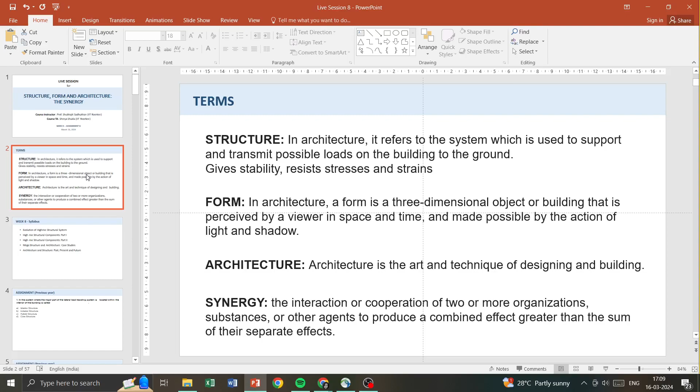What is synergy? Synergy basically means the interaction or cooperation of two or more organizations, substances, or agents to produce a combined effect which is greater than the sum of their separate effects. This means that if we added the effects of three entities separately, when we talk about synergy, the amalgamation or interaction of more than two agents together, the output is bigger than the combined sum of their separate effects. So synergy is not just summation of effects, but bigger than that, because the output is the amalgamation of all the entities, which makes it more complex and with a bigger effect.

The syllabus for the last week, week 8, had 5 lectures. The first covered evolution of high-rise structural systems - what high-rises were in the past and what it means now, from the first skyscraper building in Chicago, the subsequent increase in high-rise buildings, skyscrapers, and terminologies. Then there were 2 parts on structural components, where different kinds of structural components applicable in high-rise structures were discussed in great length. The 4th lecture was about mega structures and architecture case studies, where the most famous case studies of mega structures were discussed, like the Burj Khalifa and others.

The last lecture of the entire course was about the architecture and structure of the past, present and future, where a brief journey through past structures, what is happening contemporarily, and what would be the future was discussed. The future was not talked about just in terms of technology, but also in terms of sustainability, because people are becoming more sensitive and understanding of the environment currently.

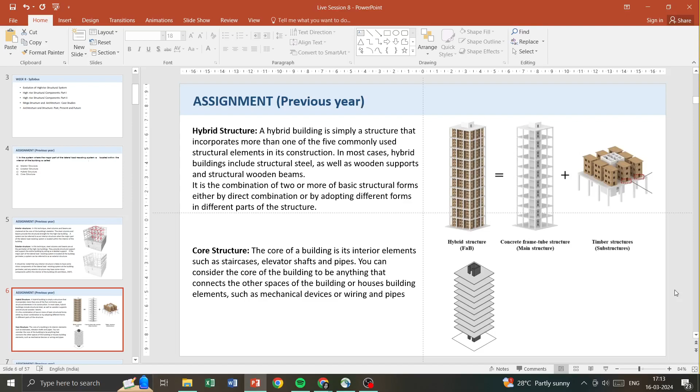What is a hybrid structure? A hybrid building is simply a structure that incorporates more than one of the five commonly used structural elements in its construction. In most cases, hybrid buildings include structural steel as well as wooden supports and structural wooden beams, etc. What are core structures? The core of a building is its interior elements such as staircases, elevator shafts and pipes. You can consider the core of the building to be anything that connects the other spaces of the building, or houses building elements such as mechanical devices, wiring and pipes.

So our answer is interior structure. In the system where the major part of the lateral load resisting system is located within the interior of the building, it is called an interior structure.

Question number 2: Match the following buildings and their locations. Three buildings have been given and three locations have been given, and you have to match these buildings with their locations. The buildings are Seagram Building, International Commerce Center, and Kingdom Tower, and the locations are Hong Kong, USA and Saudi Arabia.

First we'll talk about Seagram Building. Seagram Building is a skyscraper - I have added the image and the plan of the building. It is located in New York City, USA, designed by Ludwig Mies van der Rohe with minor assistance from Philip Johnson, Ely Jacques Kahn and Robert Allan Jacobs. The tower is 157 meters tall with 38 stories. It is an international style building with a public plaza, initially serving as headquarters of the Seagram Company, a Canadian distiller. It was completed in 1958, and the building typology is office, with architectural style being international style.

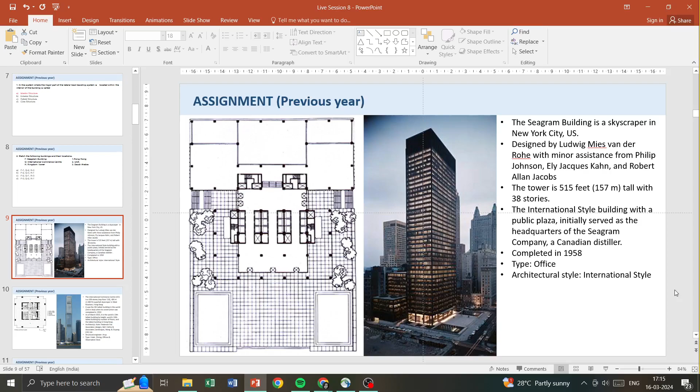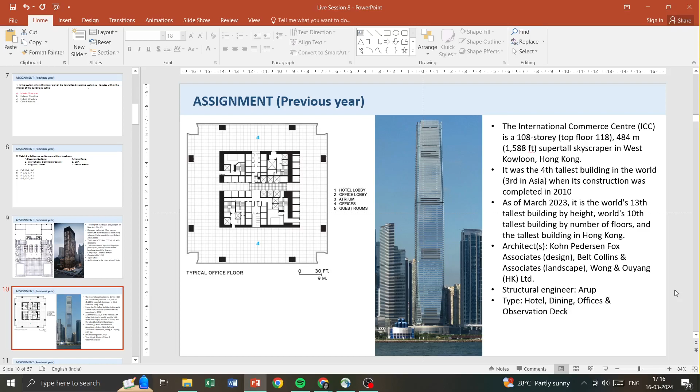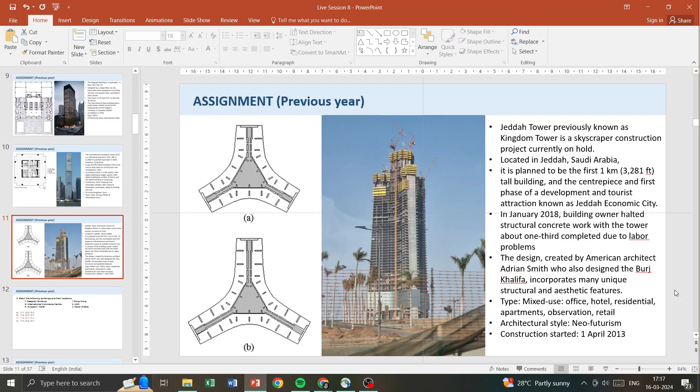Then the third building, Jeddah Tower, previously known as Kingdom Tower. It is a skyscraper construction project currently on hold, located in Jeddah, Saudi Arabia. It is planned to be the first 1 kilometer tall building, the centerpiece and first phase of development of a tourist attraction known as Jeddah Economic City. In January 2018, the building owner halted structural concrete work with the tower about 1/3 completed due to labor problems. The design, created by American architect Adrian Smith, who also designed the Burj Khalifa, incorporates many unique structural and aesthetic features. The type is mixed use - office, hotel, residential apartments, observation and retail. The architectural style is neo-futurism, construction started in 2013 and is currently on hold.

So our answer is that Seagram is located in USA, P2. International Commerce Center is located in Hong Kong, Q1, and Kingdom Tower is located in Saudi Arabia, R3. So the correct answer is C: P2, Q1, R3.

Question number 3: Taipei 101 is an appropriate example of - diagrid structure, tube and tube structure, outrigger structure, or super frame structure?

Taipei 101 is located in Xinyi, Taipei, Taiwan. The total height is 508 meters with 101 floors. The area of the plan is 50 meters by 50 meters. Cost of construction was 700 million. Architects were C.Y. Lee and partners, and the structural engineer was Shaw Shie. It was started in 1998, and the building is an office complex plus mall. The structural system of the building includes outrigger trusses, moment frames, and belt trusses.

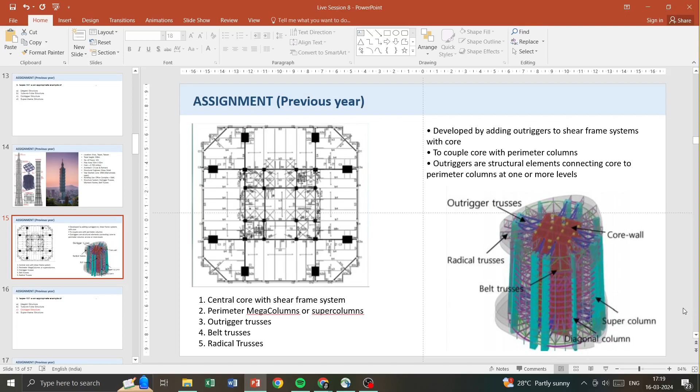Outrigger trusses are added at different floors or levels in which the core is connected to the outer columns. So we have mega columns in Taipei 101 on the surrounding, and a central shear frame system, with outrigger trusses on different floors which connect the core to the mega columns. So the answer is outrigger structure, because outrigger trusses are used in this structure. The correct answer is C, outrigger structure.

Question number 4. Which of the following high-rise structural systems has the highest structural efficiency to build tall structures? Concrete framed tube, steel diagrid, tube and tube, steel framed tube.

Framed tube system is one of the most widely used tube systems. Compared to tube and tube system, it features a much stiffer exterior tube. The stiff tube is achieved through closely spaced columns connected by deep spandrel beams, which are firmly joined together to make the stiff exterior shell.

So what happens in framed tube is that it has a really tough exterior tube. It's a tube type of structure, but the exterior is really stiff, and that stiffness is achieved by closely spaced columns connected by deep spandrel beams which are joined together to make the stiff exterior shell.

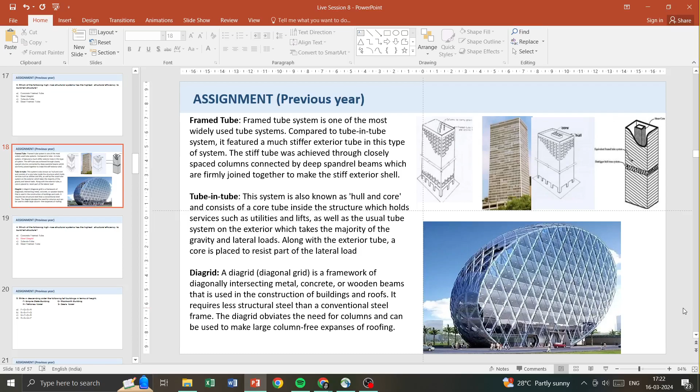Then diagrid. A diagrid, or diagonal grid, is a framework of diagonally intersecting metal, concrete or wooden beams that is usually used in the construction of buildings and roofs. It requires less structural steel than a conventional steel frame. The diagrid obviates the need for columns and can be used to make large column-free expanses of roofing.

So the options were concrete framed tube, steel framed tube, steel diagrid, and tube and tube. The answer with the highest structural efficiency is steel diagrid.

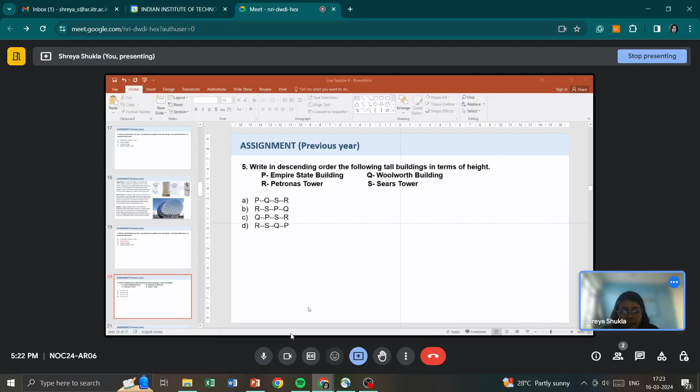Question number 5. Write in descending order the following tall buildings in terms of height: Empire State Building, Woolworth Building, Petronas Tower, Sears Tower.

So this is how the four buildings mentioned in the question look like: Empire State Building, Woolworth Building, Petronas Tower and the Sears Tower.

We have been asked what is the descending order of the following tall buildings in terms of height. Descending order as in from tallest to shortest.

Empire State Building is a 102-story Art Deco style skyscraper in Manhattan, New York. It was designed by Shreve, Lamb and Harmon and built from 1930 to 1931. Its name is derived from Empire State, the nickname of the state of New York. The building has a roof height of 380 meters and stands a total of 443 meters tall, including its antenna.

The Woolworth Building is an early American skyscraper designed by architect Cass Gilbert, located at 233 Broadway in the Tribeca neighborhood of Manhattan, New York City. It was the tallest building in the world from 1913 to 1930, with a height of 241 meters. More than a century after its construction, it remains one of the 100 tallest buildings in the US. The architectural style is neo-Gothic.

The Petronas Towers, also known as KLCC Twin Towers, are a pair of 88-story supertall skyscrapers in Kuala Lumpur, Malaysia, standing at 451.9 meters. They were the tallest buildings in the world from 1998 to 2003, until surpassed by the 2004 completion of Taipei 101. The Petronas Towers are the world's tallest twin skyscrapers and remained the tallest buildings in Malaysia until 2019, when surpassed by the Exchange 106. Their architectural style is postmodern Islamic architecture.

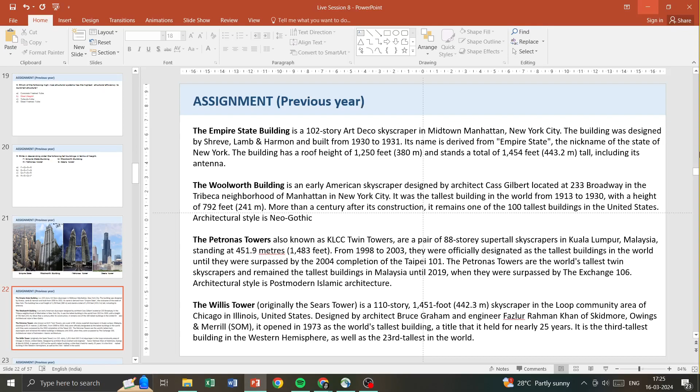The Willis Tower, originally known as Sears Tower, is a 110-story, 442-meter skyscraper in the Loop community area of Chicago, Illinois, United States. It was designed by architect Bruce Graham and engineer Fazlur Rahman Khan of Skidmore, Owings and Merrill (SOM). It opened in 1973 as the world's tallest building, a title it held for nearly 25 years. It is the third tallest building in the Western Hemisphere and the 22nd or 23rd tallest in the world.

This is an image showing different skyscrapers along with their height. The tallest structure right now is Burj Khalifa at 828 meters, Taipei 101 at 508, Petronas Towers at 452, Sears Tower at 442, Empire State at 381, and Woolworth Building at 241. So our answer in order would be Petronas Tower, Sears Tower, Empire State, then Woolworth. Petronas Tower is R, Sears Tower is S, Empire State is P, and Woolworth Building is Q. So the answer is B: R, S, P, Q.

Question number 6: Which of the following is an example of a diagrid exterior structure? Aon Centre, USA; Carnegie Hall Tower, USA; Burj Al Arab, Dubai; O14 Building, Dubai.

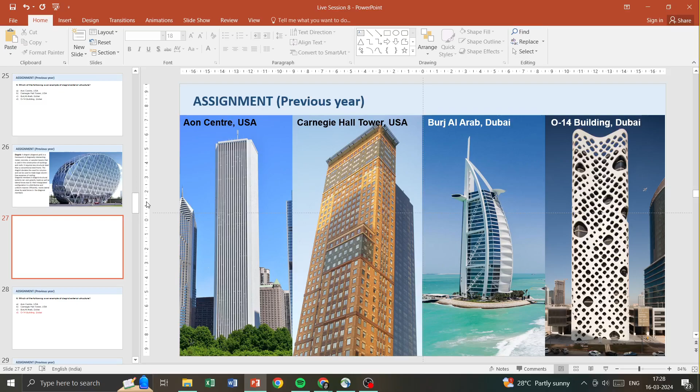The buildings mentioned in the question are Aon Centre, USA; Carnegie Hall Tower, USA; Burj Al Arab, Dubai; and O14 Building, Dubai. Burj Al Arab, Dubai, uses an exterior frame structure with a braced frame structure, as is evident from images, which might or might not be given in your questions—so you'll have to remember what kind of buildings look like what. The O14 Building, Dubai, actually has a diagrid structure; it's visible how there is a diagonal grid going on in the building. So the answer is O14 Building, Dubai.

Question number 7: A dash consists of horizontal girder and vertical column members rigidly connected together in a planar grid form. Options: coffer slab, moment resisting frame, filler slab, outrigger frame.

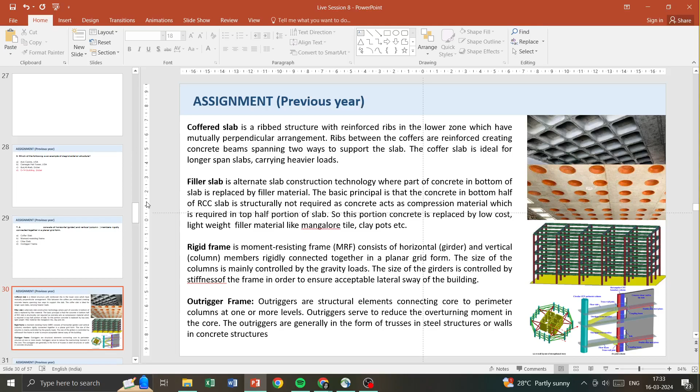Outriggers serve to reduce the overturning moment in the core, and the outriggers are generally in the form of trusses in steel structures or walls in concrete structures.

So our answer is moment resisting frame. A moment resisting frame consists of horizontal girder and vertical column members, which are rigidly connected together in a planar grid form.

It was opened in 1976. The architect was Edward D. Dart. There are 104 stores in this building, and there are 74 floors. The total retail floor area is 70,400 square meters. It is named after the nearby Chicago Water Tower, and it is owned by affiliates of Brookfield Property Partners.

So what are the different types of tube and tube systems? All four structural systems mentioned in the question are different types of tube systems. I'll quickly explain what these are.

Tube in tube system: a tube in tube structural system is a form created by an inner core within an outer frame tube, where a portion of the lateral load is resisted by the core. The combined action of the core and the framed tube aids in resisting gravity and lateral loads. Core and outer tube are connected by the floor diaphragm, which transfers the lateral loads to both systems.

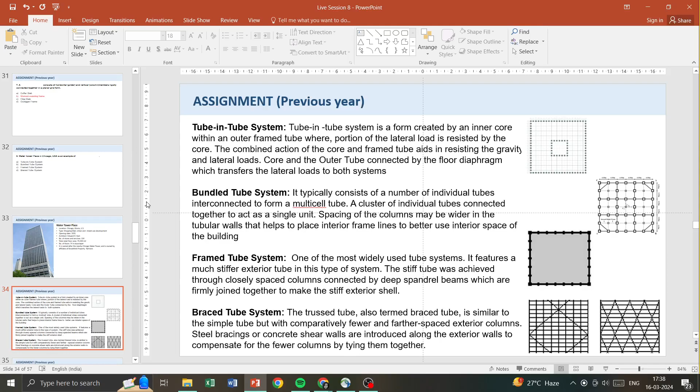So what happens in braced tube system is that it's a simple tube system in plan, with fewer and farther spaced exterior columns. But on the exterior there are steel bracings connecting the different ends of the system together to compensate for the fewer columns. So in plan there are fewer columns, but the structural efficiency is supported by the provision of bracing in the outer shell. So these are the four types of tube systems, and this is what Water Tower Place looks like and is.

Now looking at the plans and sections or elevations of the different tube systems. In framed tube, you see the columns are very closely spaced because there is no internal core. In trussed tube, the columns are sparsely spaced, but there is a brace or truss outside the structure to support it structurally.

In bundle tube, different tubes or different squares or cuboids of columns are built in together. Then framed tube-in-tube, when the outer is a framed tube, columns are placed very close to each other, and there is one internal tube, meaning the internal core is also taking load.

Then trussed tube-in-tube, in which the columns in the exterior are at some spacing, but they are structurally supported by braces, and in the interior there is also a core which takes the load. The core also takes the load structurally.

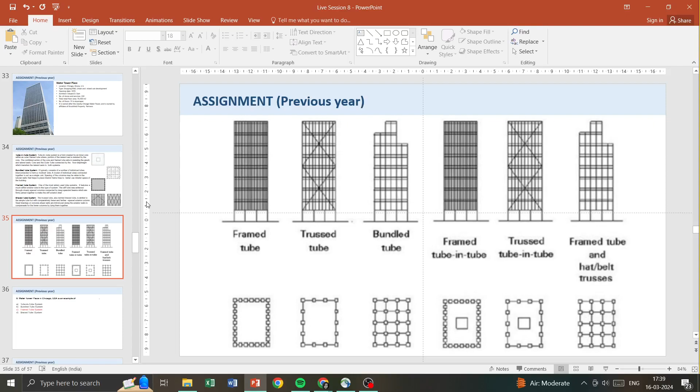Then framed tube and belt trusses, so it's a bundled tube kind of structure with different belt trusses in it. So our answer is framed tube system.

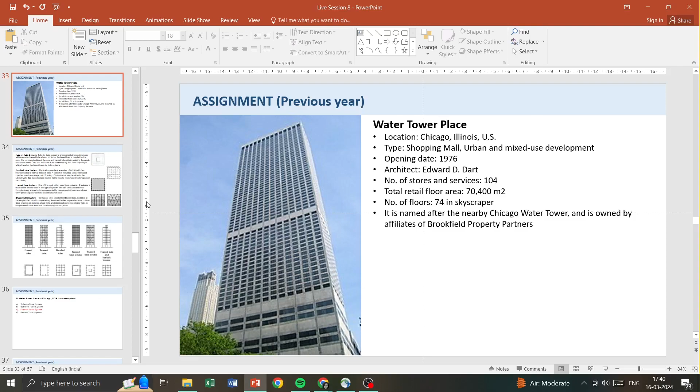The Water Tower Place Chicago is an example of framed tube system because it has spandrel beams at different levels, stiffening it up, and the structure has columns outside the perimeter. So the answer is framed tube system.

Question number 9. Which of the following building structures is an example of bundled tube system? Sears Tower USA, John Hancock Center USA, Seagram Building USA, Shanghai Tower China. So which of these is an example of bundled tube system?

So this is how the buildings look like. This is Sears Tower in US, then John Hancock Center, Seagram Building, and Shanghai Tower. Now I have added sections and plans of these buildings here.

So Sears Tower, on different floors you can see it's a bundled tube structure. In the initial floors it has a grid of 3 by 3, 9 bundles. On the above floors, the bundles are reduced to 7, 2 are removed. Then on the next floor, 5 bundles are there. Then on the topmost floors, 2 bundles are there.

So the bundles get reduced with each set of floors. Sears Tower is a bundle tube system in which the height of the bundles decreases on some floors.

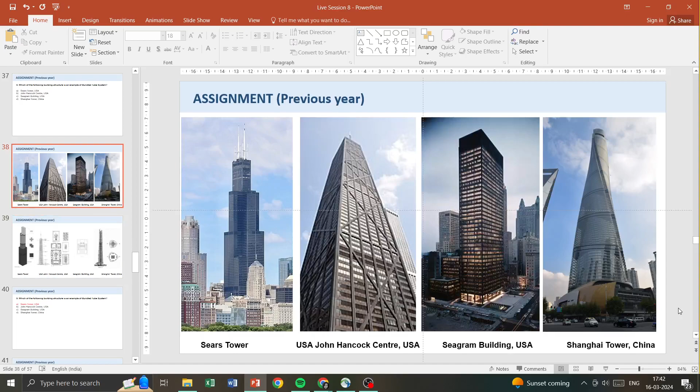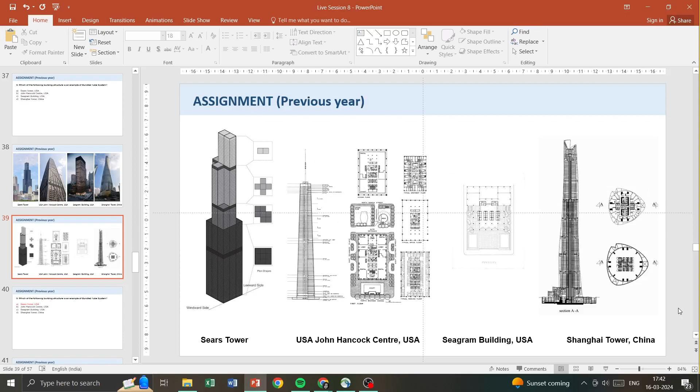Shanghai Tower has an aerodynamic shape to tackle the wind, and it has a shape that spirals a little. I think I can see mega columns in the outer structure of Shanghai Tower, but I'm not sure what other structural elements are in it.

So our answer is that the example of bundle tube system from the four examples given is Sears Tower USA.

Question number 10. Match the following structural systems. Three images have been given and three terms have been given. The terms are split core, central core, and atrium core. You have to match the image with the term. Images are termed 1, 2, 3 and the terms are termed P, Q, R, and you have to match them.

There are different core types in high-rise buildings. Central core: the core location is inside the perimeter of the building form, surrounded on all sides by floor area. So in central core, the core is in the center and surrounded by floor area on all sides.

Split core is when two or more cores exist, typically with the main core in one part of the building and a secondary core elsewhere, perhaps on the other side of the building. So in split core there are two cores, one primary and one secondary, both possibly located on different sides of the building.

End core is a core located at one end of the building. Then atrium core - an atrium is basically a large open air or skylight covered space surrounded by a building. So in atrium core there is an open space which has a split core inside the atrium area.

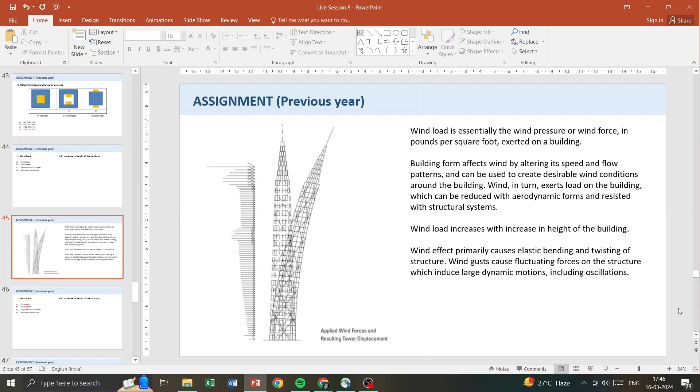So during the construction of skyscrapers, wind load is a very important requirement that is taken into consideration, and various techniques exist to reduce the wind load on the building, like the use of dampers to reduce oscillation and other things. So the answer is that wind load increases with increase in the height of the building.

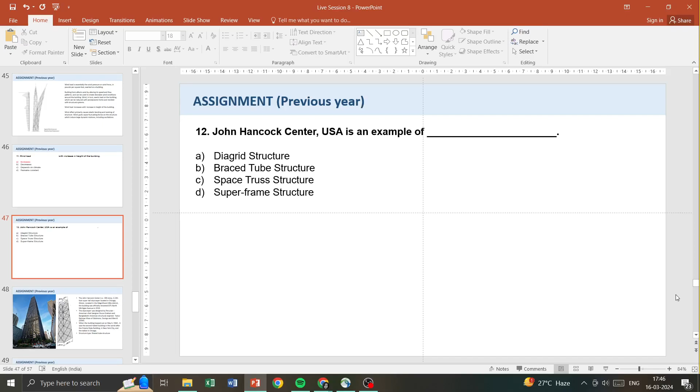Question number 12. John Hancock Center, USA is an example of which structure type: diagrid, braced tube, space truss, or superframe structure? This is what John Hancock Center looks like, and we have seen this in a few of the previous questions also. It is a 100-story skyscraper.

It is a 1,128-foot super tall skyscraper located in Chicago, Illinois, and it was officially renamed as 875 North Michigan Avenue in 2018.

It was designed by Peruvian American chief designer Bruce Graham and Bangladeshi American structural engineer Fazlur Rahman Khan of Skidmore, Owings and Merrill. The building topped out on May 6, 1968. It was the second tallest building in the world after the Empire State Building in New York, and the tallest in Chicago.

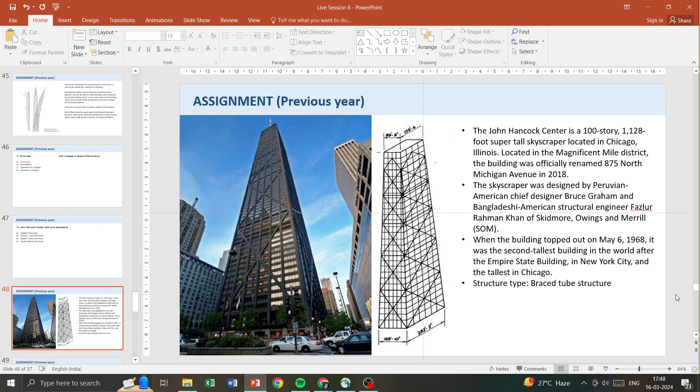The structural type is braced tube structure. So it's a tube structure and the outer part has braces on it, so it's a braced tube structure. Our answer is braced tube structure. John Hancock Center, USA is an example of braced tube structure.

Question number 13. CTBUH stands for Center for Tall Buildings and Urban Housing, Council for Tall Buildings and Urban Habitat, Center for Transport Buildings and Urban Housing, or Council on Terminal Buildings and Urban Habitat? So CTBUH full form is Council on Tall Buildings and Urban Habitat.

The Council on Tall Buildings and Urban Habitat, CTBUH, is an international body in the field of tall buildings, including skyscrapers and sustainable urban design. A non-profit organization based at the Monroe Building in Chicago, Illinois, United States, the CTBUH announces the title of World's Tallest Building and is widely considered to be an authority on the official height of tall buildings. Its stated mission is to study and report on all aspects of the planning, design, and construction of tall buildings.

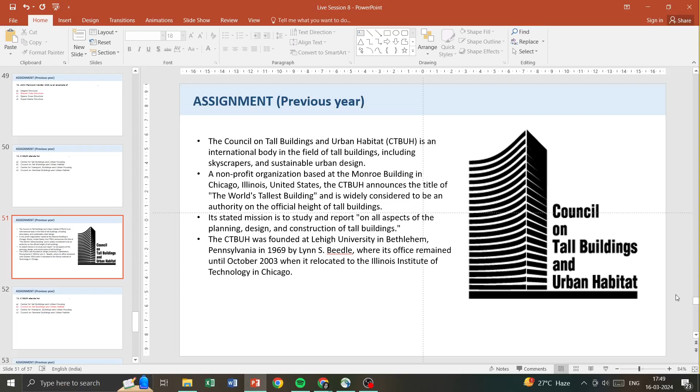It was founded at Lehigh University in Bethlehem, Pennsylvania in 1969 by Lynn S. Beadle, where its office remained until October 2003 when it relocated to the Illinois Institute of Technology in the US. So the answer is CTBUH stands for Council on Tall Buildings and Urban Habitat, because the council is about skyscrapers, tall buildings, and sustainable urban design. So the terms used are tall buildings and urban habitat.

Last question of today's session. Which of the following is not a type of structural bracing? V bracing, P bracing, K bracing, or chevron bracing?

So what is bracing? A diagonal bracing or bracing is a structural component of just about any building. It provides lateral stability, preventing the collapse of walls, decks, roofs and many other structural elements. In bracing, basically structural elements or structural points of the structures are joined together diagonally.

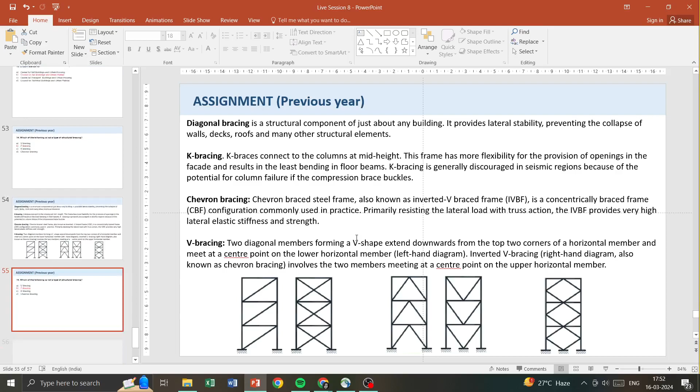So our answer is P bracing. The question asked was, which of the following is not a type of structural bracing: V bracing, P bracing, K bracing, or chevron bracing? V bracing, K bracing, chevron bracing, and X bracing are all different types of bracing, mostly based on the shape they resemble. But P-bracing does not exist and is not a type of bracing in structural buildings.

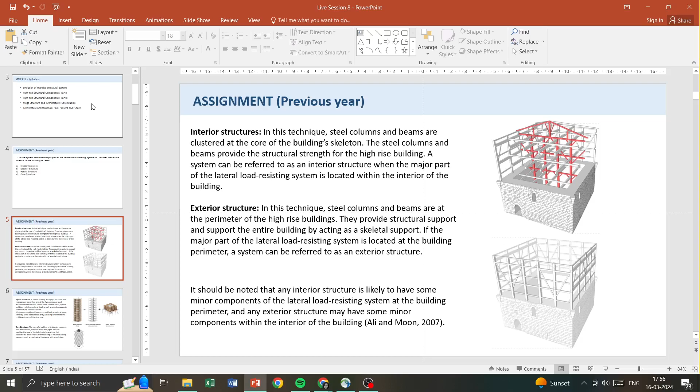The first question was: in the system where the major part of the lateral load resisting system is located within the interior of the building, it is called an interior structure, and that was the answer.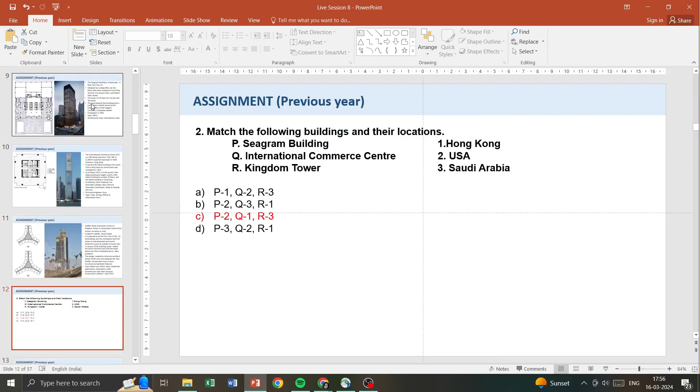Then, Taipei 101 is an appropriate example of an outrigger structure because it has an outrigger truss on some floors of the building.

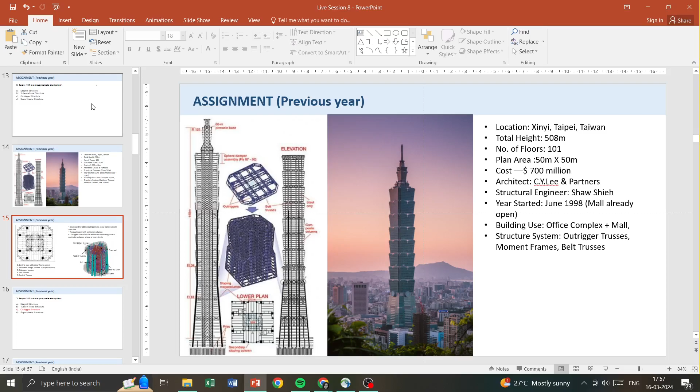Which of the following high-rise structural systems has the highest structural efficiency to build tall structures? The answer is steel diagrid, which has the highest structural efficiency to build tall structures.

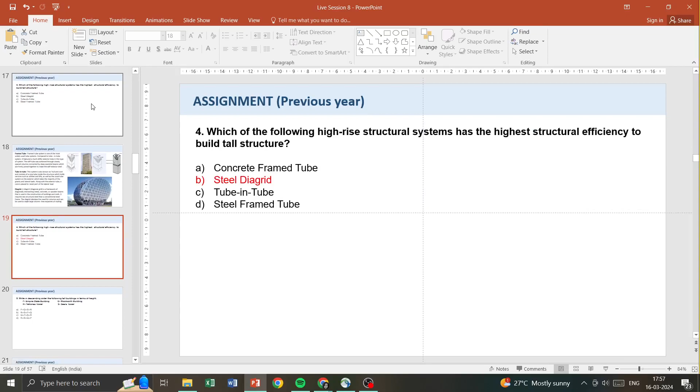The next question was to arrange the following buildings in descending order of height. Among these, the tallest was the Petronas Tower, then Sears Tower, then Empire State Building, then Woolworth Building.

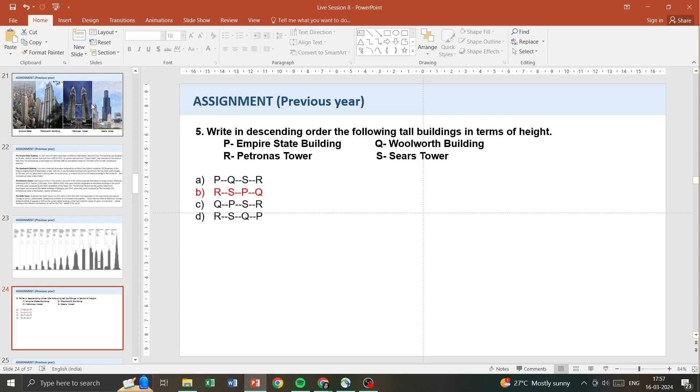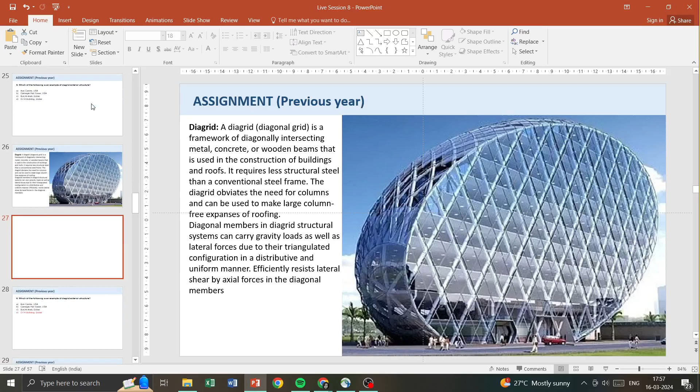Question 6: which of the following is an example of a diagrid structure? The answer is O14 in Dubai. This is how O14 looks, and it's a diagrid structure.

Then question 7: a dash consists of horizontal girder and vertical column members rigidly connected together in a planar grid form, and the answer is moment resisting frame, which consists of horizontal girder and vertical column members rigidly connected together in a planar grid form.

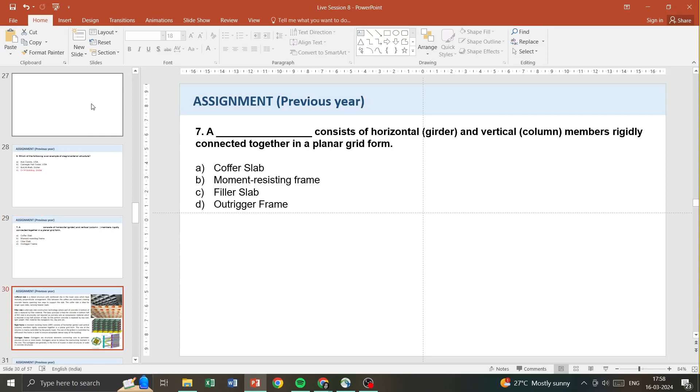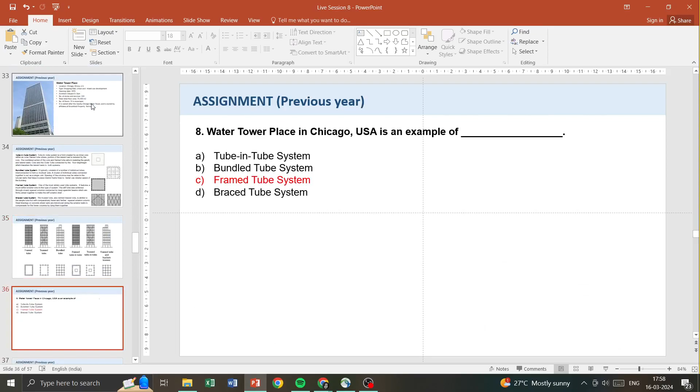Question 8: Water Tower Place in Chicago is an example of a framed tube system. Then, which of the following building structures is an example of a bundled tube system? The answer is Sears Tower, which is a bundled tube system.

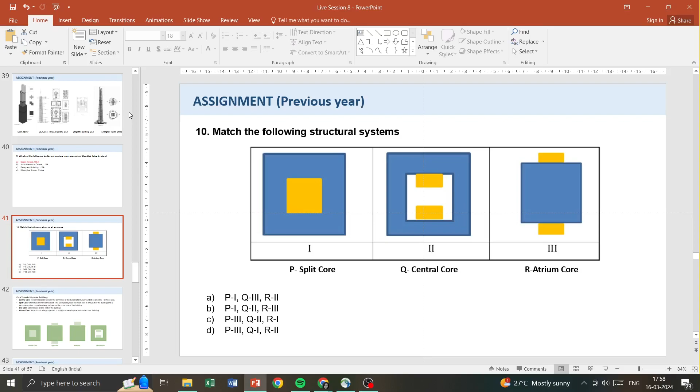Then you were supposed to match the structural systems with the terms. P is split core, so the third image is split core; Q is central core, the first image; and R is atrium core, the second image. So the answer is P3, Q1, R2.

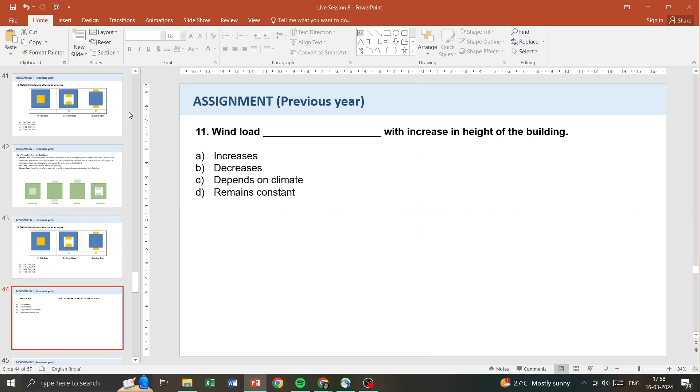Question 11: wind load increases with increase in the height of the building, so the answer is A, increases.

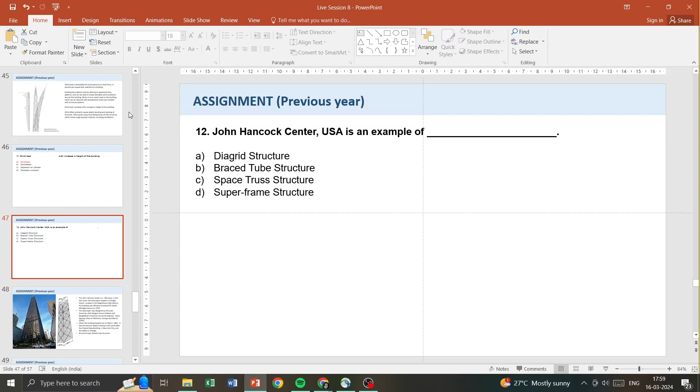Question 12: John Hancock Center USA is an example of a braced tube structure. And then CTBUH stands for Council on Tall Buildings and Urban Habitat.

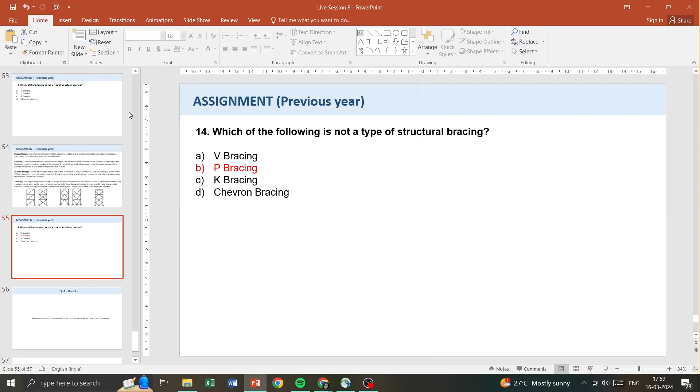Question 14: which of the following is not a type of structural bracing? The answer is P bracing. V, K, chevron, and X bracing are all types of bracing based on their shape, but P bracing is not any type of bracing.